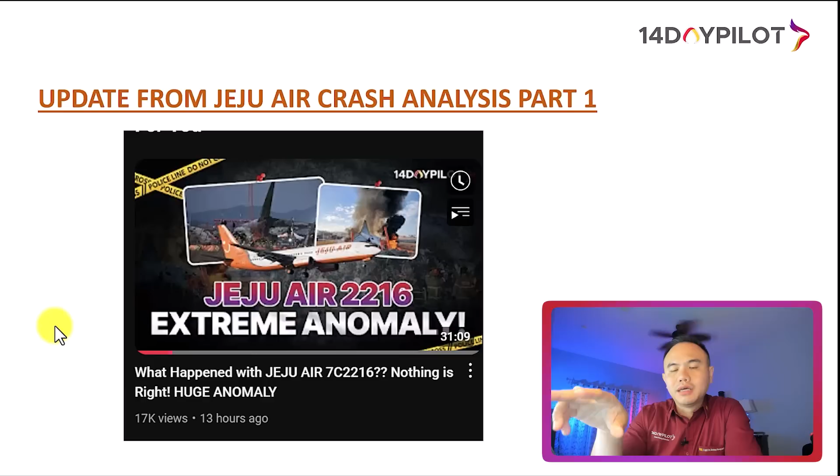So number one, why did the airplane make an impossible 180-degree turn to land on runway 19? Previously we had no reference because the ADS-B was off, but now I think the Korea NTSC has provided a beautiful graph here showing the 737 making the impossible turn from runway 01 to runway 19.

The second question: why was the ADS-B missing at 500 feet AGL? If you look at Flight Radar and move the airplane icon all the way to the right, you'll see the lowest altitude was 500 feet, and then it disappeared. We cannot see whether the airplane made a go-around and turned back for landing - there's no data on it. The only way to get that data is from the flight data recorder, the black box, which has already been retrieved by the NTSC.

Why weren't there flaps, landing gear, or thrust reverser? Again, we're going to talk about this and go a bit deeper into the systems of the 737, okay?

So I'm really thankful to this guy who gave us a heads up - there's a new video shared by Korean media showing the landing gear down on the first attempt. Wow, this is a big game changer for me. If you look here, I can see a little black dot - it's probably the landing gear from the nose, what we call the nose landing gear.

I try to play around with the contrast and shadow. I cannot see the main landing gear here, probably just too dark. But if you can see here, it's probably true. This is the first attempt, which is what we expect.

If you see the flight radar, they're using the normal approach for ILS runway 1, and suddenly there's a bird strike. So we're gonna start from this point on this second video. If you remember, which came first in part 1, I modified it a little bit.

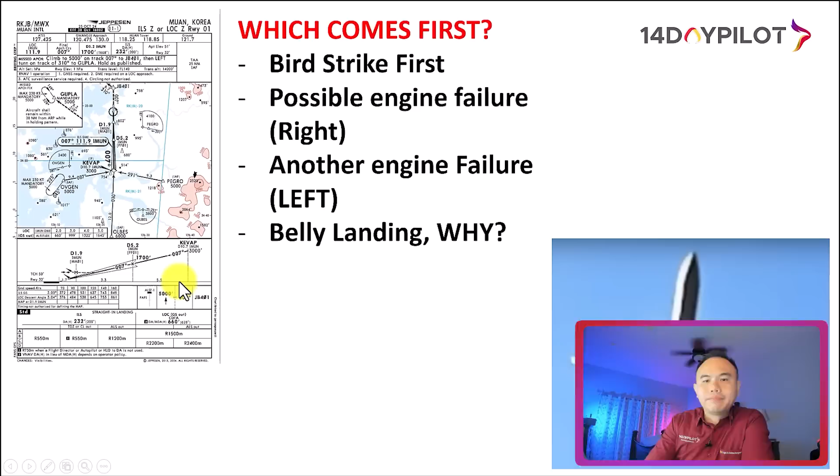Now we confirm probably the bird strike came first. Why? Because if this is real and correct and accurate, it means the airplane was in the normal approach to land, and suddenly there was a bird strike. You can see the exhaust here is like the compressor stall, the indication from the right engine. I believe there's no mirroring, or because of the vertical shoot from the phone, I don't think that's happened here.

I believe this is like a normal view, like people took the videos using the phone with the back camera, so there will be no mirroring. That's what I believe.

So that will be a possible engine failure on the right side, then another engine failure on the left side. This will be more interesting to discuss, and I'm really scared if this happened for real. And then following by the belly landing.

The question is why. So this is the ILS Zulu. I expect they shoot the ILS Zulu or Yankee, doesn't matter. This is runway 01 in Muan, Korea. They're coming from runway 01, south to north, and landing gear is down here, and I see the flaps is down. It's very clear that the flaps is down.

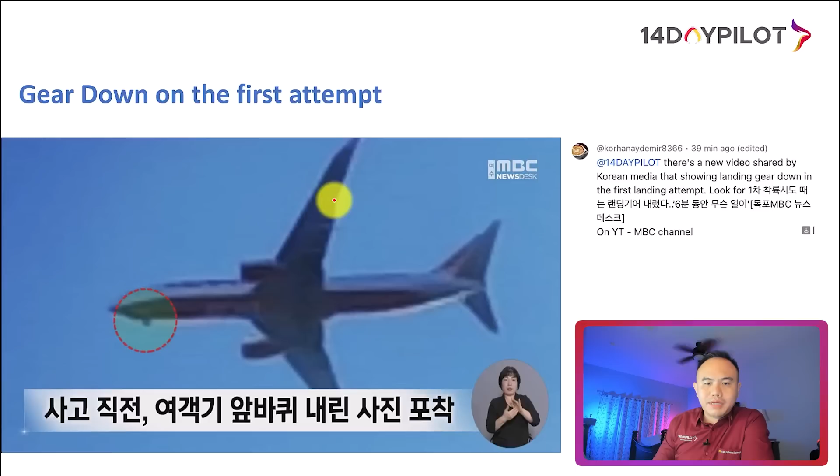There's like a bulky area over here, but this part is too dark to tell whether this is a landing gear or not. Let's assume this is a normal approach on the ILS 01. Then we got an engine failure because of the bird. So we started from there.

But the question is why Jeju took runway 19. So this is the instrument approach, and probably they got an engine failure here, as I described in part 1, because they're not flying straight. Instead, it's moving like this.

So it's possible they already had the airplane flying unusually. The vertical speed is pretty massive here with altitude 800 feet. We already discussed this in part 1. And now this is runway 1.

They supposedly go from here. Instead, they took a go-around because of the bird strike. Based on the explanation from the regulator, this is what they did. They come back here, making 180. So probably not like the downwind like this, probably over the runway and then turn like this.

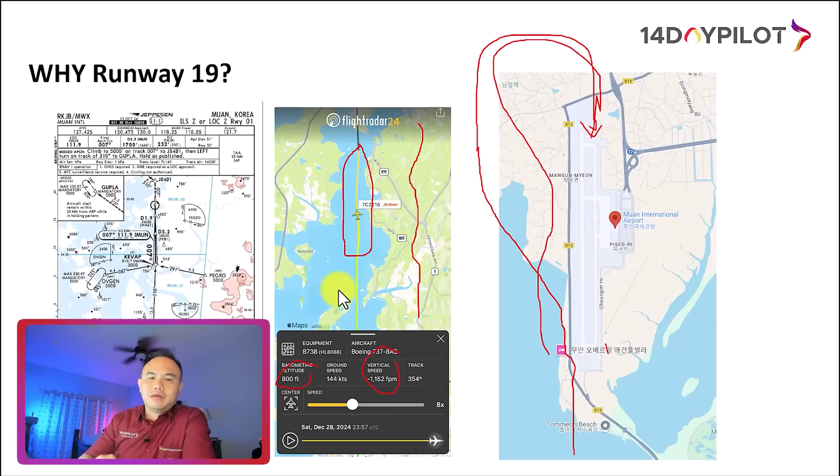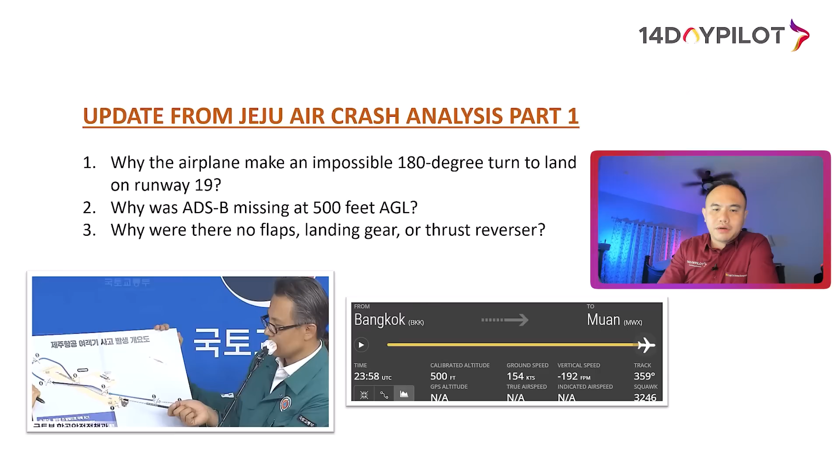We need to see the real flight path though. I cannot just say whether it's taking the left side like circle to land, go to the downwind and turn right, or fly over the runway and then make a teardrop. Based on what they have here, it looks like they make a teardrop here. So it's not completely like a downwind.

We can see this is runway 19. That's what we call the airport diagram for everybody not really familiar with it. Now, if they make the teardrop like this, that's what we call an impossible turn. Everybody learns that in flying school - it's not recommended if you got an engine failure after takeoff below 1,000 feet AGL. Probably you're not gonna make it turning 180 back to the opposite runway.

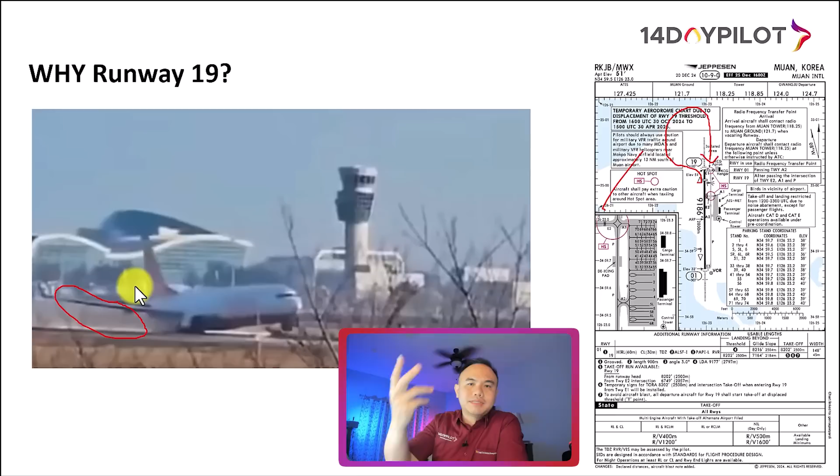In this case, we see there were no flaps, because when the 737 made a go-around, they need to put the gear up and then flaps up - we call that a cleanup maneuver. And there's no gear. That's the question, why. And this is the picture, right? This is very clear: let's go to teardrop, make an impossible turn, and this is the new data for us.

Now, there's a probable scenario, at least the most reasonable for now. Number one is another bird strike on the other engine, which is the left, or the crew shut down the other operative engine, which a lot of experts already discussed. But I'm not gonna talk about whether it's true or not - that's not my job, that's the job of the NTSB to find out.

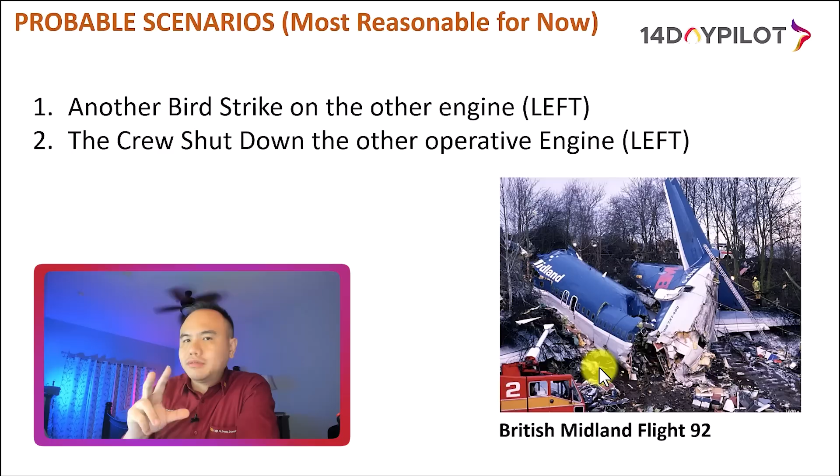But at least if that situation happened this time, it wasn't the first time. It's British Midland Flight 92, which shut down the wrong engine during the engine failure, and finally crashed about a mile or half a mile from the threshold. Too bad, right? Now, the evidence - that's the impossible turn.

That's one of the biggest evidences that probably, again, the airplane experienced a loss of thrust on both engines, for which there's a procedure from Boeing on how to handle this situation. But if you lose the engines at less than 1,000 or 2,000 feet, probably you're not going to make it to relight the engine or turn it back on. Naturally, when people lose the engine like this in a big airplane, most likely you're going to think, okay, let's come back and land, even if you have to land on a taxiway. This is how normally in a small GA airplane you'd do the impossible turn, and you need practice to do this. So this is evidence number one for the loss of thrust on both engines.

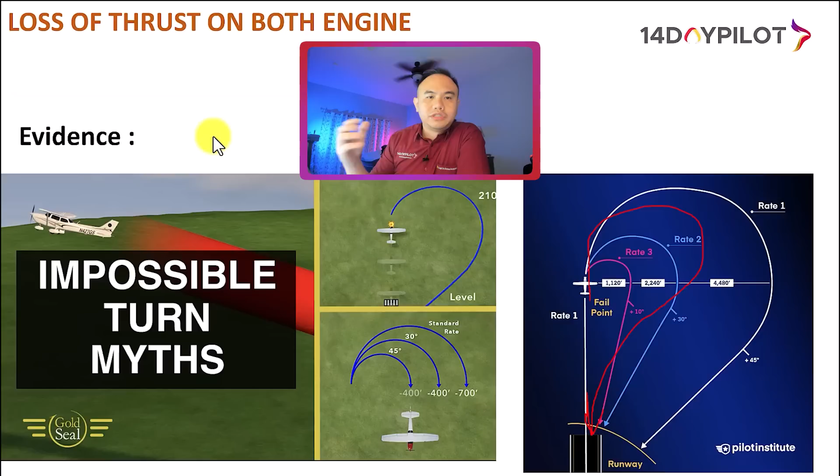Again, naturally, if you don't have the engine, the best bet is what Sully did, choosing the water, and probably this pilot thinks, okay, let's go back. If Sully that time had chosen another airport, LaGuardia or any airport, probably they would have crashed as well. But the instinct of the pilot made the difference. So in this case, with Jeju Air, I believe if they happened to lose both engines, they probably chose, okay, let's go back and see. But the problem now is what happens if you have the loss of thrust on both engines, or let's say you get an engine failure.

Number one, you get a loss of AC electricity if the APU is not available or not started, because the altitude is too low and panic was there, everybody panicked. The PM didn't do the job as PM, and the PF may be too busy with the flight, so the CRM is another problem. So in this case, if the APU is not started, then you only have battery and standby power.

Then number two is the loss of hydraulic systems. I've got the table here with the detailed equipment lost or degraded. If you lose both engines, you're going to lose the AC generators, no AC power, and only APU or battery limited power. We don't use the APU because probably there's panic, or they don't have time to start it because the altitude is too low and they're busy with the single engine issue. The hydraulics lose pressure from both systems A and B. We're going to talk about this. Then the other part is the landing gear - normal extension is unavailable, so you have to drop the gear manually. The thrust reversers are not deployable unless on standby hydraulic, and if you go to standby hydraulic, there will only be partial thrust reverser.

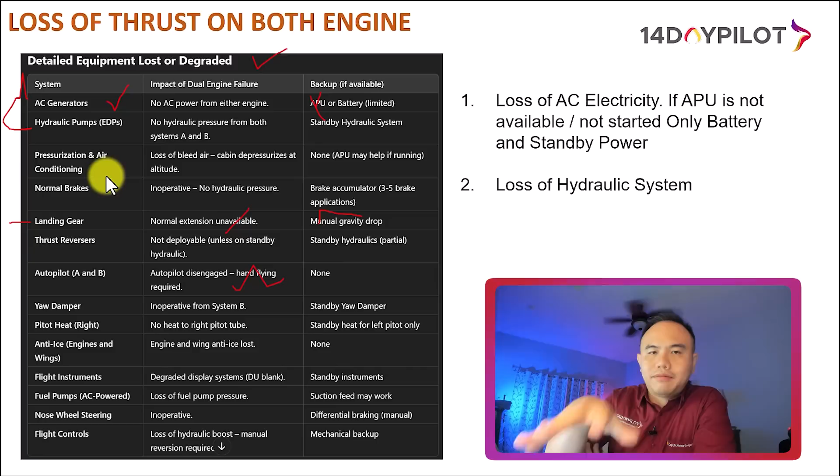Now it's starting to make sense. Based on these conditions, we know for sure autopilot A and B disengage as well, so hand flying is required - that's why they have to hand fly the airplane. Like in part one, I found that the path is not straight, because if you have an engine failure, you can still fly with the autopilot. But if you lose the electricity and the hydraulics, the autopilot must be turned off, and you only have the standby yaw damper. So we're going to talk about the AC generator, hydraulic, landing gear problem, and thrust reverser. Autopilot is off, of course, because you see the airplane is not moving straight and laterally.

Now, when you lose the electrical systems without engine-driven generators, most electrical power is lost, and the aircraft relies on standby power from the battery or APU if you turn it on. But in this case, if you don't have the APU, then you've got an inverter to convert DC from the battery into AC systems. But of course, there's load shedding - the kVA is very small on the battery, so you cannot use the battery inverter to supply the whole AC power. There will be load shedding; the airplane's auto logic will choose which instrument or equipment really needs to be powered.

And then you're going to lose the engine-driven generators. You're going to lose the TRUs, main AC buses, DC buses, and transformer rectifier units. That DC system is also gone. So in this case, you lose the major part of the electrical system, and that's what leads into the ADS-B issue.

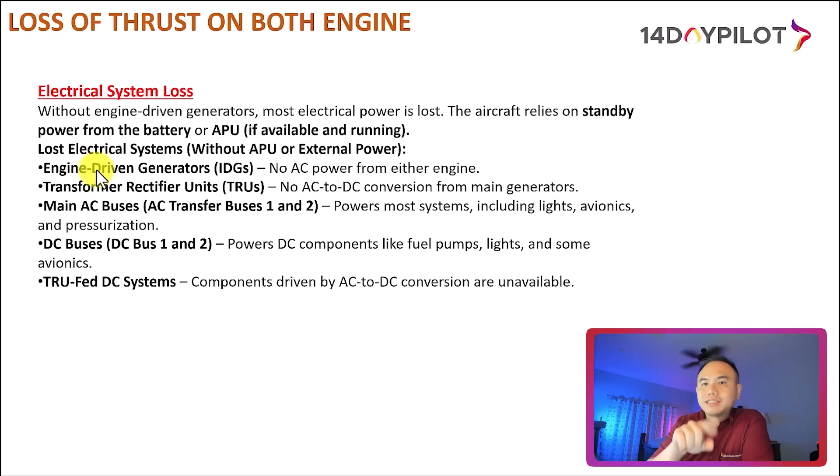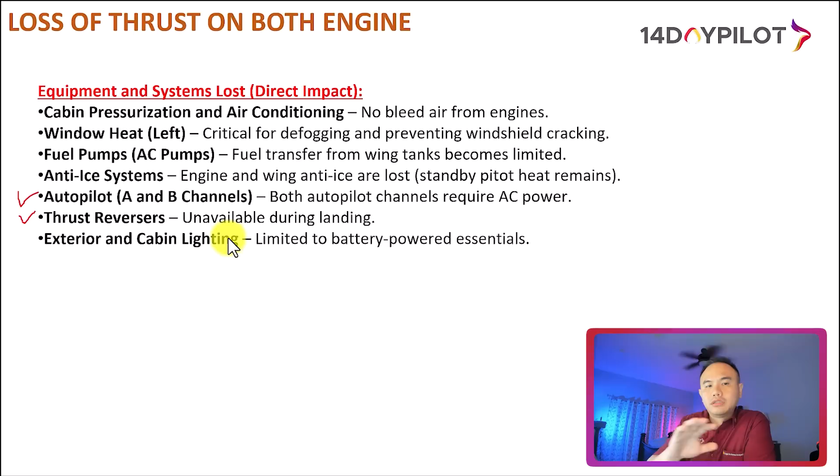So hang in there - now, what equipment and systems are lost, which has a direct impact? There's a system here for thrust reverser and autopilot, unavailable during landing, but autopilot channels require AC power. So this is what happened: if you lost thrust on both engines, you lose the total electricity, and you're going to lose the autopilot and thrust reversers.

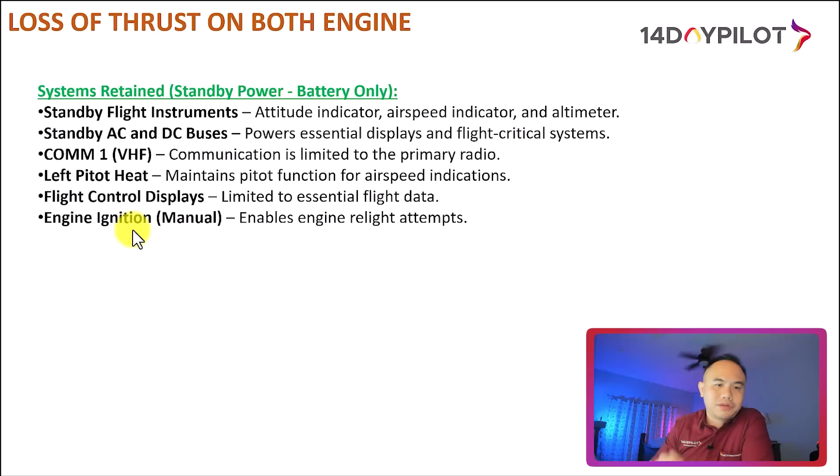Now, what kind of systems are available with standby power from the battery? That's what you have. This is not related to our case, so I'm going to skip it - it's just nice to know for you.

Hydraulic, there are three hydraulic systems, A, B, and standby. So if you lose both engines, you're going to lose the EDP, engine-driven pump. In part one, I explained about the electric motor-driven pump. But now, if you lose the electricity and also lose the hydraulics, what's gonna happen? Everything is gone.

So probably you're gonna have the manual reversion in here. It's very, very heavy, right? The primary flight control is lost, and remember, the leading edge, the slat and flaps. This relates to the situation why there are no flaps. If you lose the hydraulics, the only way to put the flaps down is using the standby hydraulic system with the alternate electric flaps. I'm gonna show you in the next slide, okay?

And again, the landing gear, you need to do manual gear extension. So the landing gear is affected, and autopilot is unavailable, okay? And the thrust reverser isolation valve, standby hydraulic power can partially deploy thrust, partially, okay, but only in specific conditions. What is the specific condition? If I'm not mistaken, you need to have the landing gear down, and the ground sensor must sense the airplane on the ground if you want the standby hydraulic to apply the thrust reverser.

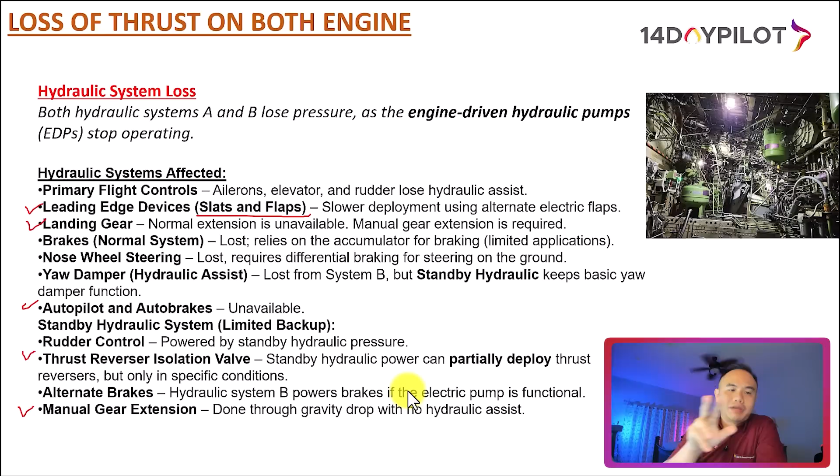And the manual gear extension, you need to do it through gravity drop with no hydraulic assist. So this is what happened if you lose both hydraulic engine driven pumps, and because you lose the electrical system, you're going to lose the electric motor driven pump.

So the next evidence is no gear. That's a problem, right? Again, manual gear extension takes time, and the airplane is possibly in a loss of thrust condition on both engines at low altitude, so there's no time to bring the landing gear down. This makes sense now, right?

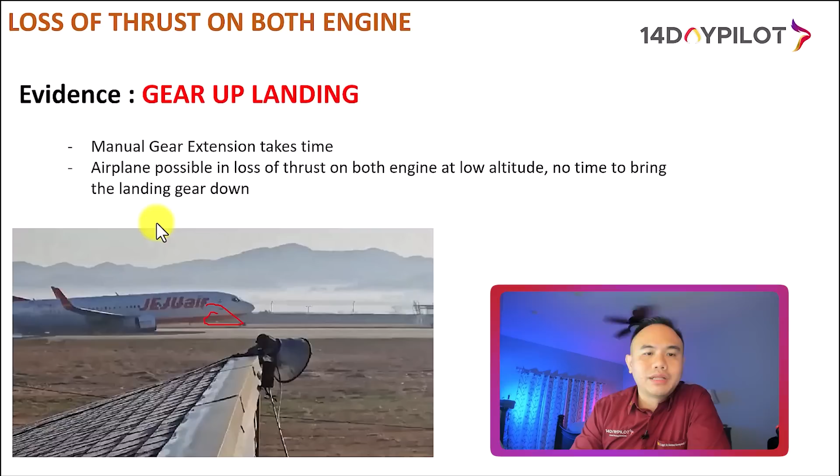The flaps not down after cleanup or go-around. Again, if you see here, this is the image from part 1. There's no flaps here, right? So with both hydraulics lost, the only way to extend the flaps is using the alternate flaps.

Which is here in the overhead panel. So when you open the red cap here and you put it on arm, you're activating the standby hydraulic, and also you're activating the up-down switch over here, okay? So in this case, it takes forever. It's a very, very long time to operate all of this.

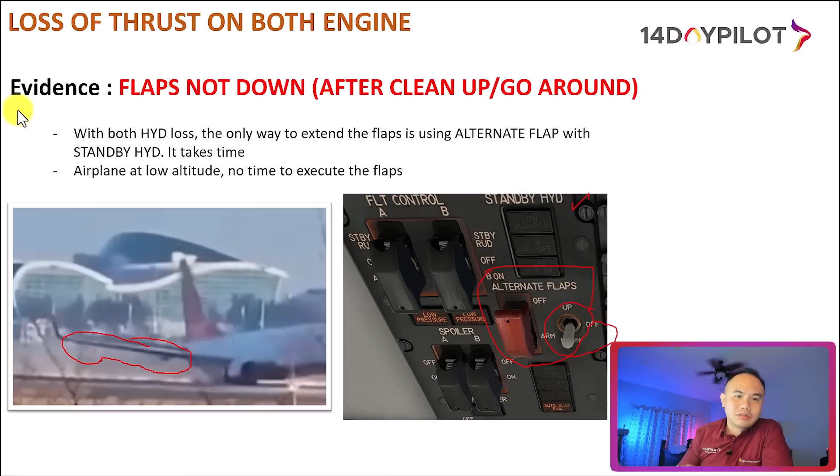So they will not have time if they lose both engines. They just need to come back and land as soon as possible. The airplane is at low altitude, no time to execute the flaps. So that's the only way to explain this scenario. No thrust reverser, hydraulic and electrical dependencies, that's a problem here.

The thrust reverser relies on hydraulic power from system A for the left engine and system B for thrust reverser number 2, the right engine, to operate. A dual engine failure would result in loss of normal hydraulic pressure, which we know actually has 3 conditions: the radio altimeter must sense that the airplane is at 10 feet AGL or below, then you can activate the thrust reverser, right? But no power yet.

And the second one, or in the Boeing FCOM it says, the landing gear must sense that the airplane is on the ground, which is the flight to ground mode. But in this case, it's different. In the belly landing, with the engine inoperative and gear up, this situation is different. You've got a belly landing, which is no gear, and the engine is inoperative, okay, gear up.

The hydraulic pressure is likely compromised, further preventing thrust reverser deployment. That's the possibility that could happen. Number 3, the standby hydraulic system can activate thrust reversers, but only if the correct conditions are met. Again, the gear down and the ground sense.

That's why, if you see in the left engine, the reverser is not deployed. But why is this open? Probably this is because of the bird strike. I don't know, this is like the cowling broken or cracked or anything. Or maybe this is partial, like using the standby hydraulic. If you put both thrust reversers, maybe one cascade opens, or this is because of the bird.

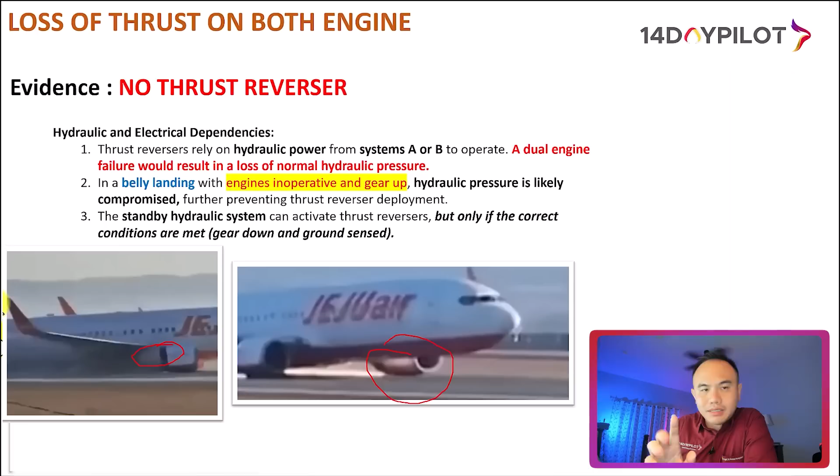But basically, I'm not really sure whether the thrust reverser works in the belly landing condition, and again, if the loss of thrust or lost engine on both engines is happening.

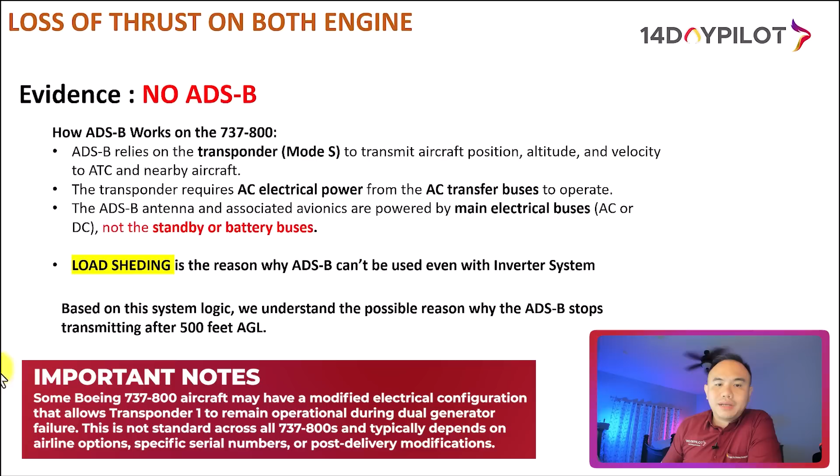Now, no ADS-B. The ADS-B works on the 737-800 based on 3 things here. It relies on the transponder, and the transponder requires AC electrical power from the AC transfer bus, okay? So from the generator, let's say this is the engine, the generator from the IDG comes to the AC transfer bus. So this is the main bus of the Boeing.

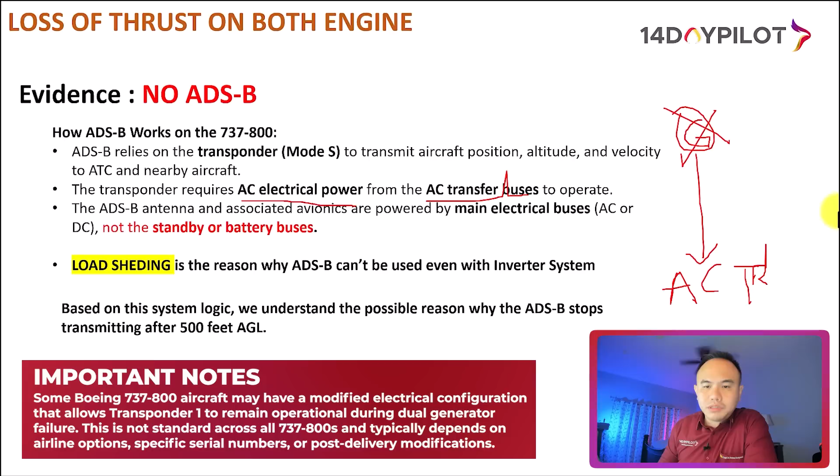So when you lose the engine, you're gonna lose generator 1 and generator 2 if you lose both engines, okay? If you lose one engine on the left, you're gonna lose generator number 1, which is the AC transfer bus 1, is also gone. But they have the bus tie contactor that can give you another AC electricity from the right engine.

But if you lose both engines, then you lose everything, okay? The problem now is the ADS-B antenna and associated avionics are powered by main electrical buses, AC or DC, not the standby or battery bus. So if you lose AC systems, there will be load shedding because the battery will use the inverter to supply the AC system to the required, crucial, or critical avionics, but not the ADS-B. So you cannot use the ADS-B with the inverter systems.

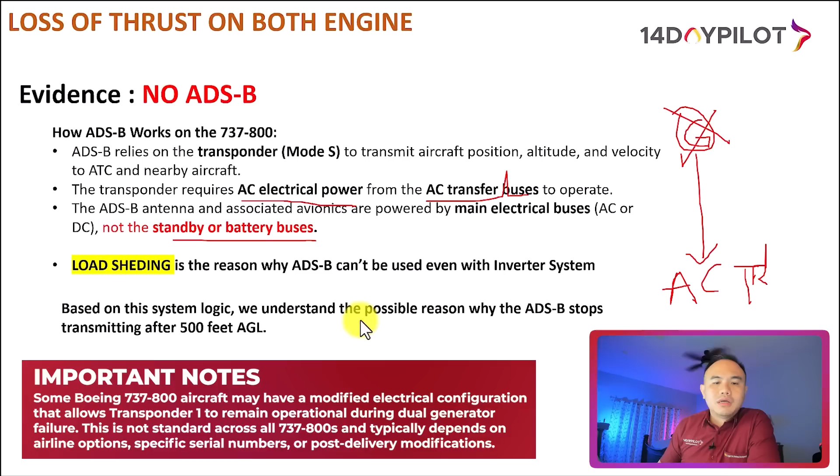That's why, based on the system logic, if the scenario of loss of both engines happening, we understand the possible reason why the ADS-B stops transmitting after 500 feet AGL. So, refined storyline - this is what I believe. Then we just need to wait until the final investigation result comes. Then we're gonna do comparison, and hopefully we can learn a lot from here.

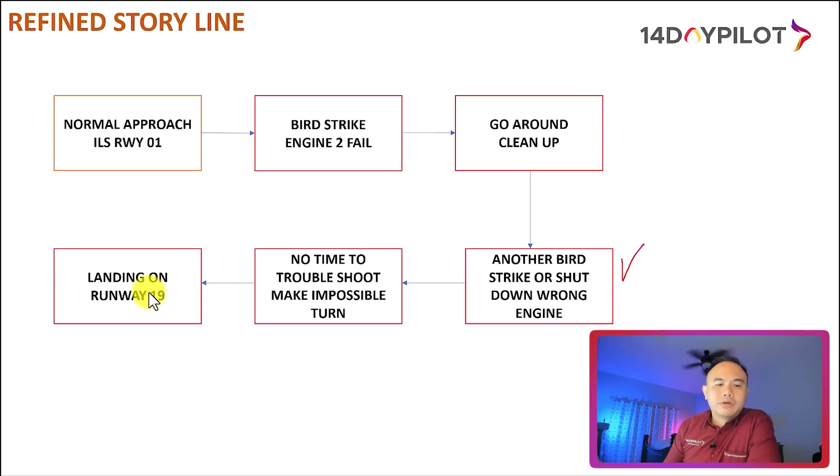So normal approach, ILS runway 01, got a bird strike, engine fails, then go around and clean up. For the second segment, again go to higher altitude, but probably they found that the airplane cannot go higher. For some reason, the performance doesn't meet the criteria or something, right? Then another bird strike or shut down wrong engine - that could happen, and NTSC will know. No time to troubleshoot, then make impossible turn and landing on runway 19. So this is most likely the storyline that happened.

What we need to know based on the FDR and CVR: the left engine status. I want to know whether the airplane lost both engines. If the left failed, what's the cause? Is that another bird strike or shut down the wrong engine? And what happened with the cockpit crew CRM? We want to know whether they really did a good job as the PF and the PM, because the landing was good, the flare is excellent, right?

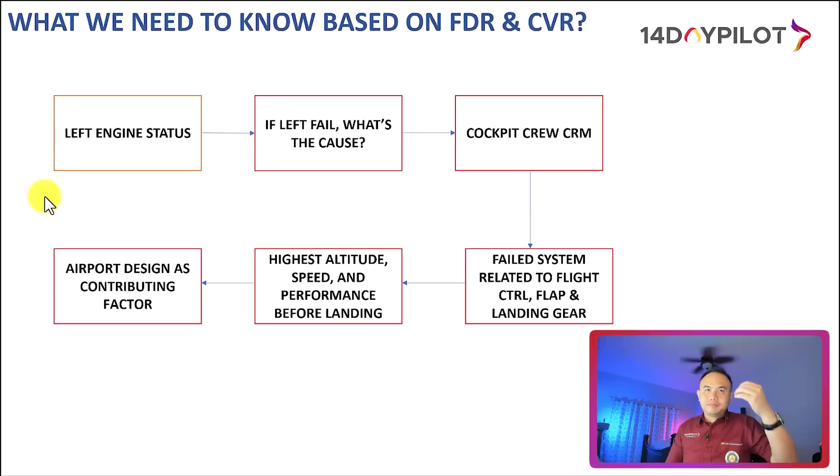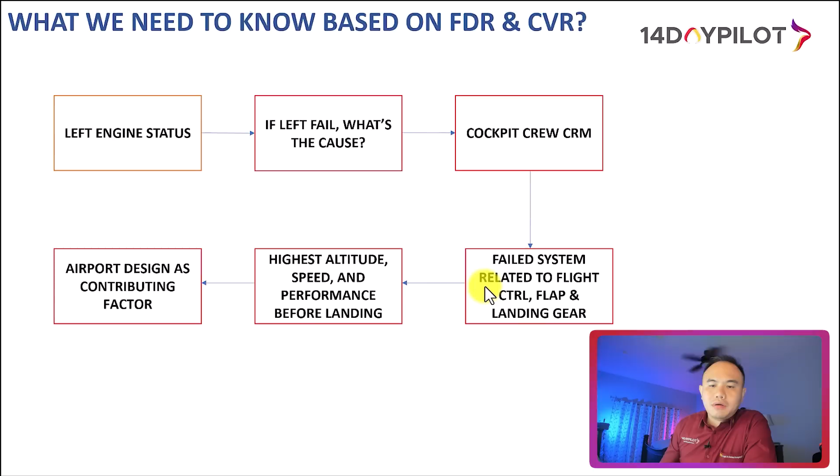It's just a matter of they hit something there, which is airport design as a contributing factor, which is the last. But after the cockpit crew CRM, we're going to talk about the failed system related to the flight control, flaps, and landing gear. What kind of system failed, whether or not the predictions or the analysis that we made is correct, right?

And the highest altitude, speed and performance before landing - what is the highest altitude and how many minutes did they have to come back to the runway? And finally, since they already landed basically, if there's no wall, right, they're probably going to survive. So the airport design as contributing factor.

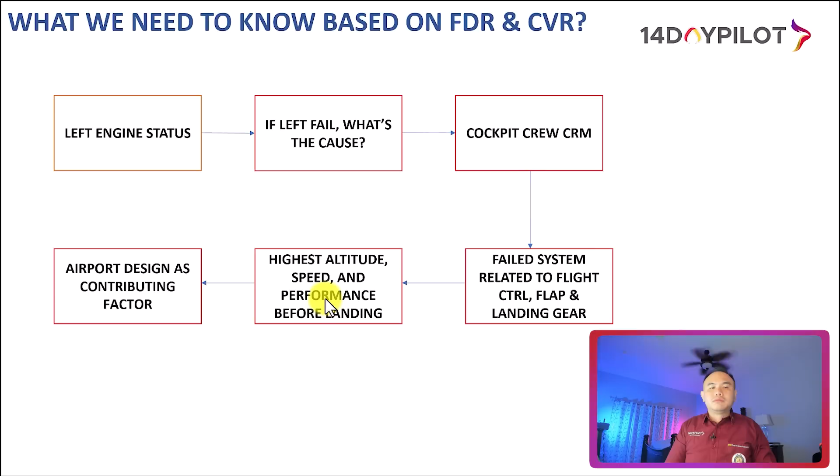So I guess this is the summary, and we're going to wait for the next, I think, 25 days until we get the preliminary report from the NTSB. So this is what we need to know based on the FDR and CVR.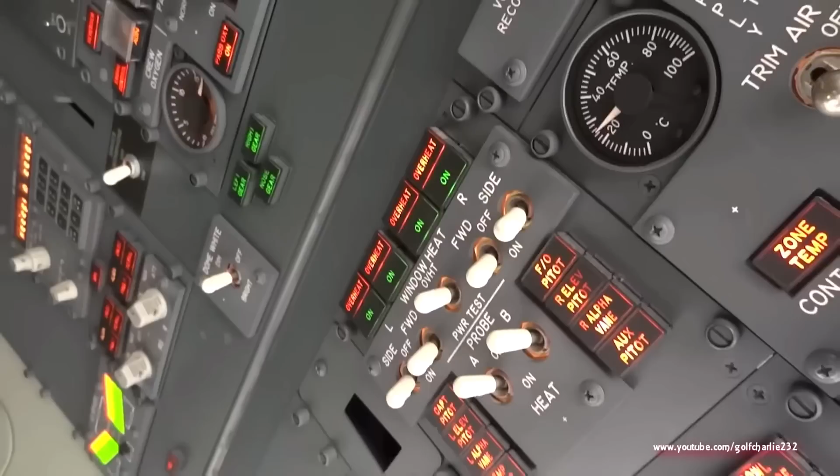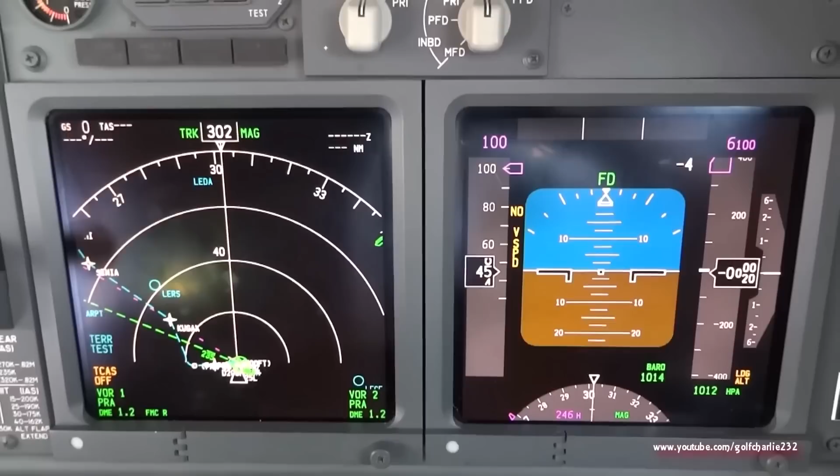Secondly, if the airplane transponder isn't connected to the standby power, which based on my research is an optional feature, the transponder may be wired to AC standby bus or another standby power source. If this caused the disappearance of the ADS-B data, it could indicate that both generators failed without the APU being activated. The only other possibility is that flight radar intentionally removed the ADS-B data for this flight.

Third, if the airplane experienced only a partial power loss after climbing past 500 feet AGL, the generator should have continued supplying electricity to the transponder, meaning the signal wouldn't have disappeared. If a total power loss occurred during the short final, a 180-degree impossible turn for the Boeing 737 would be nearly impossible. A lot happened during those critical 10 minutes following the bird strike, and NTSC will uncover the major probable cause.

One thing we do know, the Boeing 737-800 is fully capable of flying with one engine. A bird strike alone shouldn't have led to a crash. In fact, the aircraft still landed, though unfortunately it collided with the wall. At this point, the most reasonable explanation seems to be a dual engine failure, supported by the fact that the plane landed without its landing gear and flaps.